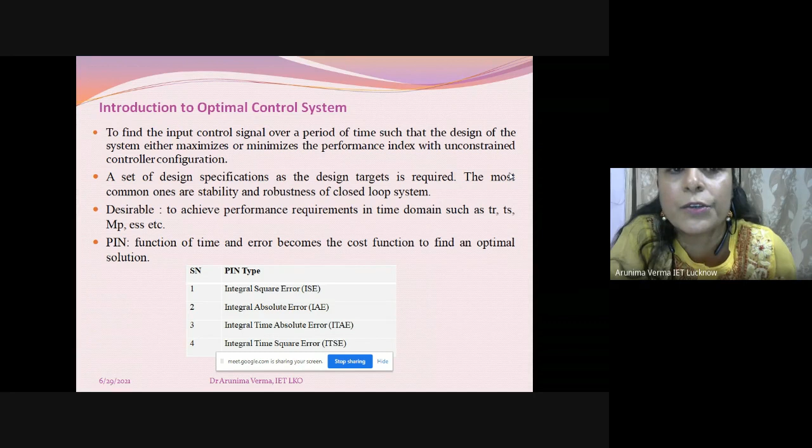Those who are listening, although it is an online technique, we will interact so that we don't get bored. A student responds: if we are considering any constraints on control, that means any minimum or maximum value, either on control or state. Unconstrained means you're not putting any limit.

Now you may ask, or rather you should ask, what is the difference between parameter optimization and optimal control system? Can anyone say what the difference is? There's one major difference.

A student answers: parameter optimization means we need to optimize the controller parameters. Suppose if it is PID - KP, KI, KD - we need to optimize and get the desired values. But optimal control means we need to obtain the optimal control in order to minimize the given performance index.

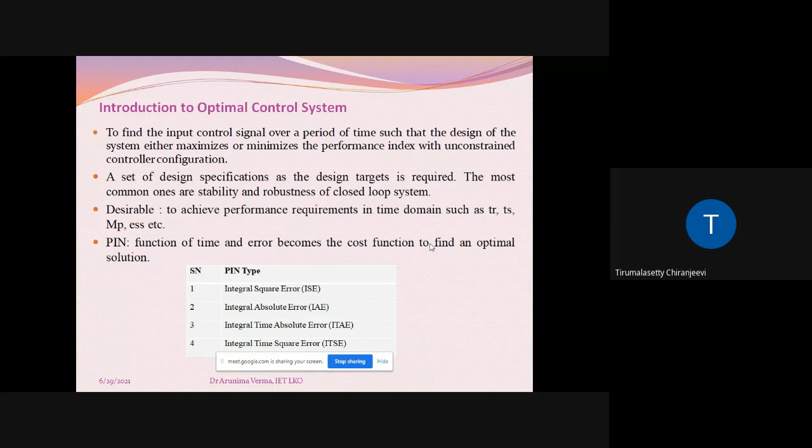To some extent, you stated the same thing put in the slide. But the major difference, although these two terms are often used synonymously, is that in parameter optimization we use certain kinds of constraints, we put limits, whereas in an optimal control problem we don't put any limit. That means it is an unconstrained controller.

What I mean is, when using a controller in an optimal control problem, that controller will not be limited - there is no boundation on what type or what degree of controller you are using. Whereas in parameter optimization, where you are particularly focused on optimizing one of the parameters, either maximizing or minimizing it, you should have a predefined controller - for example, a third order or second order controller with a particular type of configuration.

So when that type of controller is defined or predefined, we call it parameter optimization. And when the controller is not defined and is not required to be defined, we call it an optimal control system. This is the major difference between the two.

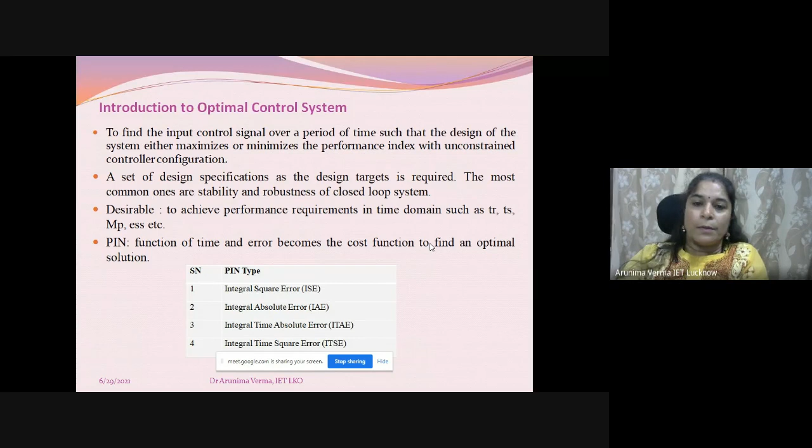The problem we are dealing with right now in speed control of variable frequency drives, we will use performance index minimization as a cost function, and then we'll go for how we are obtaining the optimal value using AI technique.

Normally in optimal control system, we deal with various types of techniques like Lyapunov stability criteria. Then we have observers like Kalman filter, and one common control, trajectory control, we go for predictive control.

Predictive control basically calculates and predicts, as the name suggests, the future value, that is it is optimistic in nature. It predicts the future value and control action, and performs a certain function through an algorithm designed such that the optimization problem at each time interval will be solved and calculated, and finally you get a predicted value.

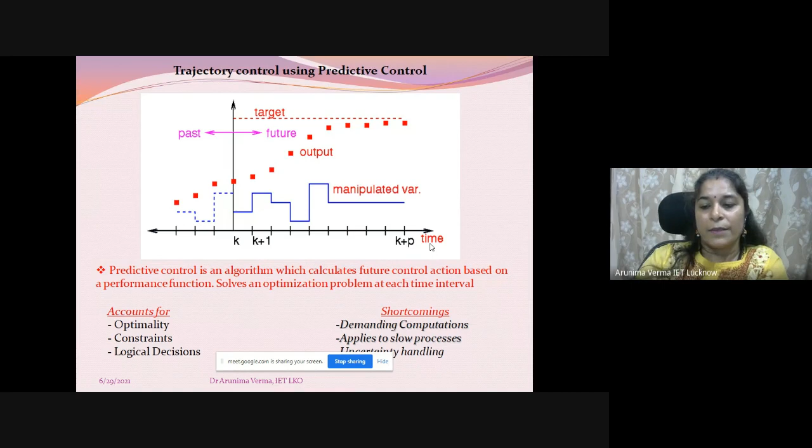So to make the system in totality a fast process control system, we go for AI techniques that we will be dealing with. This is the type of different types of predictive control.

We have deadbeat control, hysteresis based control, which is used in direct torque control, as we will be dealing with. This is what I told you, that I'll be introducing you to the 5-level flux controller, which is based on this hysteresis band control.

And then we have trajectory based, and finally model predictive control. So basically what I mean to say is, in predictive control, you require 3 stages. Number one, you should have a model to be predicted with. Secondly, there should be a limit or boundary defined for the optimization. And third, finally, you have the control output.

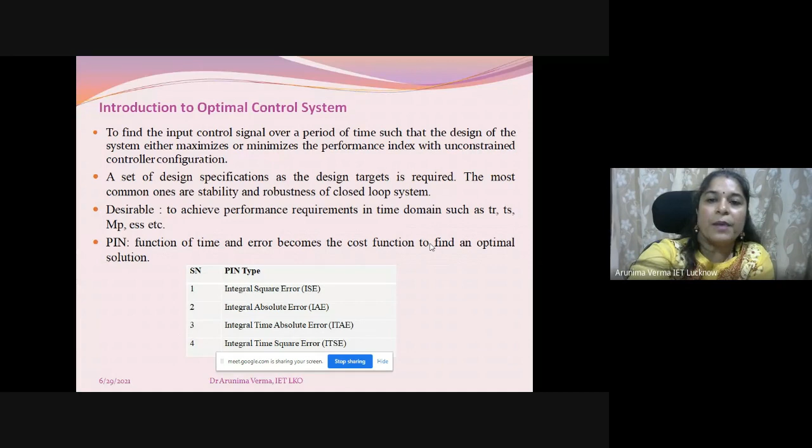Now, this is the part which I'm going to discuss in detail. As I already told you, we'll be dealing with the obtaining or improvement of transient response specifications, as you can see over here, where I defined that to achieve performance requirements in time domain, we take up these parameters or specifications, that is rise time, settling time and all. And these have been considered here as well under different dynamic conditions, that is starting, speed reversal, load application.

Now, an industrial motor, which works at very high power, has to deal with certain dynamic conditions. These are the 4 or 5 very common dynamic conditions which a motor has to face in an industrial application, because there are certain applications where it requires frequent starting, and speed reversal means braking of that particular speed of the motor. Finally, we have application of load and removal of load. That means you are suddenly applying the load, you are suddenly removing the load.

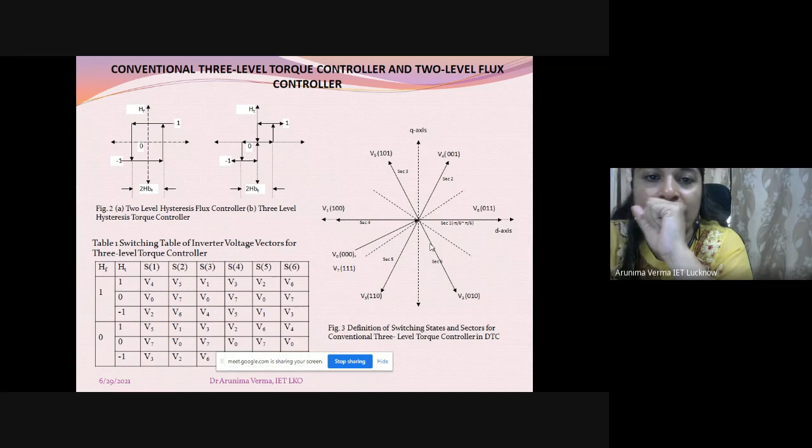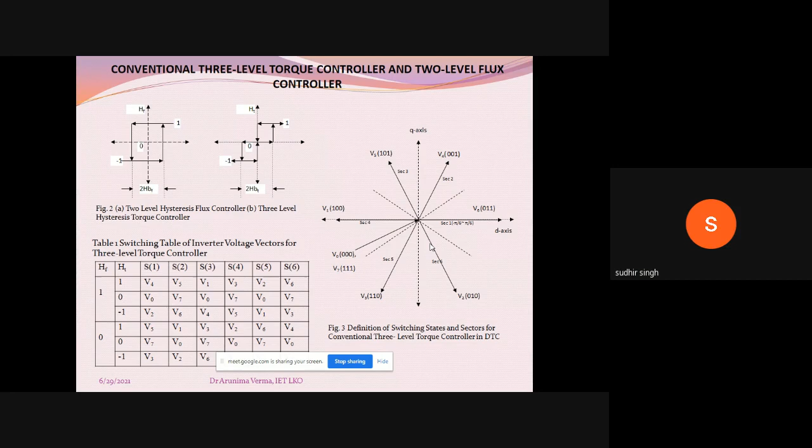Now, these are the space vectors. I don't know how much you know about space vector modulation. See, we have PWM technique. All of you know what a PWM technique is? Yes, ma'am. What is that? Pulse width modulation. What does it do? Actually, we compare the sinusoidal signal with the triangular carrier signals, and the pulses are generated. Okay. So one such modulation technique is the sinusoidal one. You can compare it with any reference signal; it is not necessary that it has to be sinusoidal. Although AC is easily available, that's why we can call it sine PWM as well.

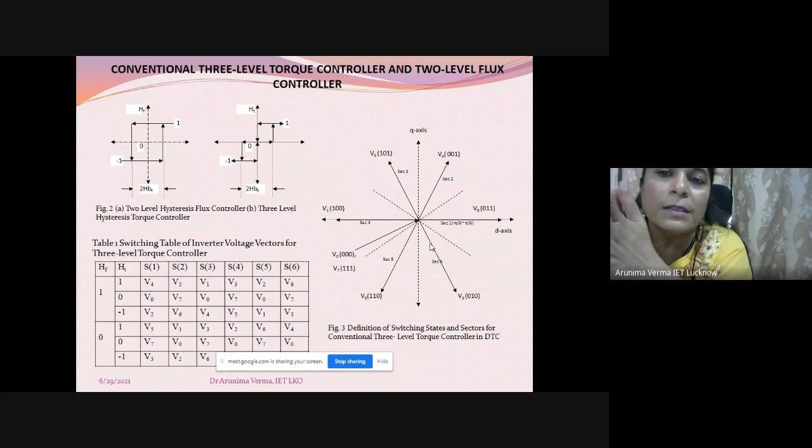Now, sine PWM or in general the PWM technique that we talk about is a very basic one. This space vector PWM technique is basically an advanced technique where the voltage that we are going to feed to the inverter as a gating pattern will be decided in a particular hexagonal trajectory. As you can see, the space vector is divided into 6 parts. That is why it is known as hexagonal, and the sectors are divided from sector 1 to 6, and the reference voltage will lie between these sectors only. This is how you define the switching pattern.

The switches of the inverter are going to be switched like this: 1 2 3 4 5 6 switches are there in a 3-phase inverter. So when the hysteresis band of the flux controller is 1 and 0, and the torque hysteresis controller is 1, 0, -1, how the switching will take place, and when these switches are on, which voltage vector will be available in which band is given by table 1. As you can see in table 1, by switching on the devices in the fashion shown, and with the hysteresis band of flux and torque controller lying in the range, you will get a particular voltage vector present in a sector given in figure 3. And then that particular value of voltage is available across the inverter. Is it clear?

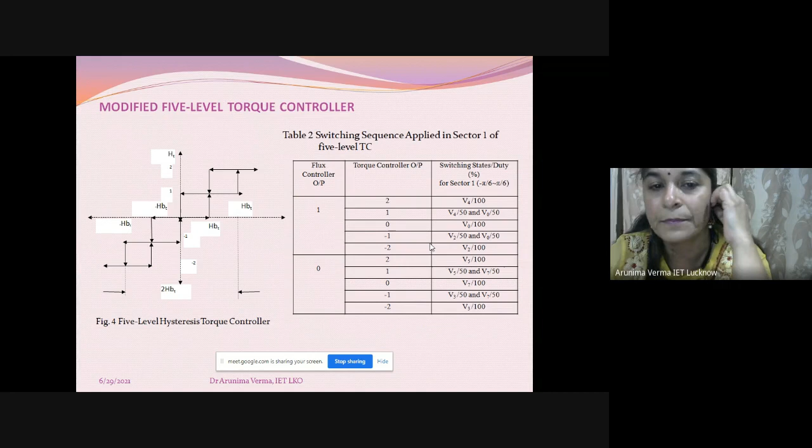Now a question arises: why are you only using a 5-level torque controller, and why not disturb the flux controller? See, you have only 2 types of control: torque control and flux control. Since it is a vector control technique, these 2 controls, torque and flux, are independent of each other. So either you can make a control modification in torque, or in flux. It is not that you cannot make changes in the flux controller. You can keep the torque controller as it is, change the flux controller and see what output you get, right? So in this case, the 5-level torque controller is being modified.

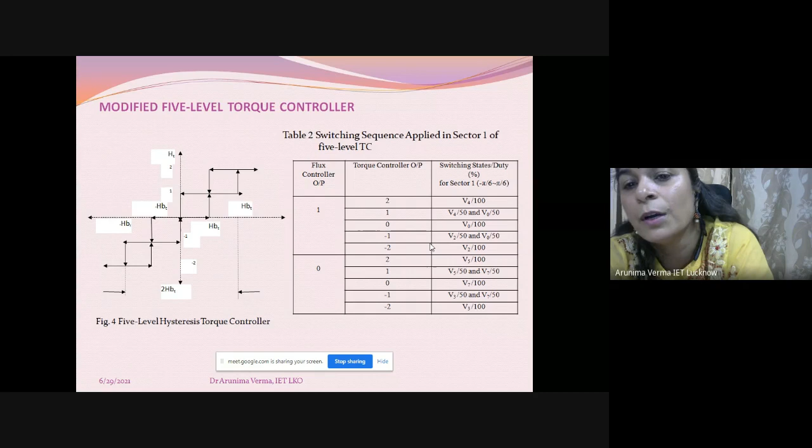That means 3-level is being modified into 5-level, and the levels are defined like this: 2, 1, 0, -1, -2. These are the 5 levels, and this is how the duty cycle of the devices, SCRs or thyristors connected in the inverter, are switched on. Table 2 basically gives you the same thing. As you saw in table 1, the torque hysteresis band is defined between 1 and -1, whereas in table 2 the torque controller output is defined between 2 and -2, going through 1, -1, and 0.

Now, as you can see in table 1, when switch 1 is on, we get V4, the 4th vector, which lies in the 2nd sector. We get this switching, 0, 0, 1, and V4 is available. Whereas when the hysteresis torque control goes through the 0 value, you get V0 as the output.

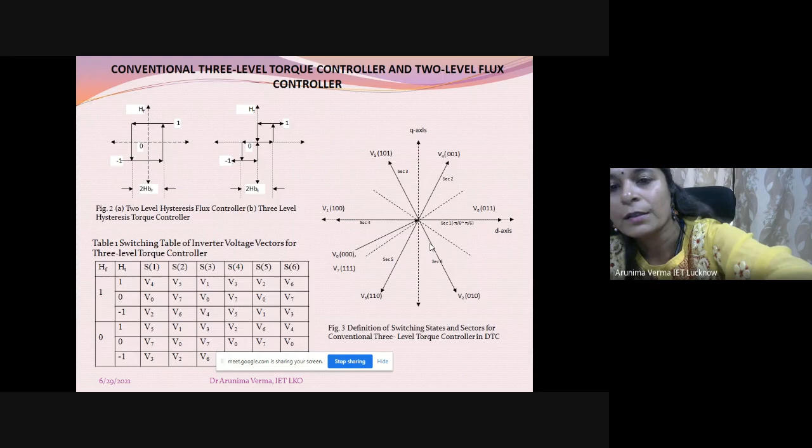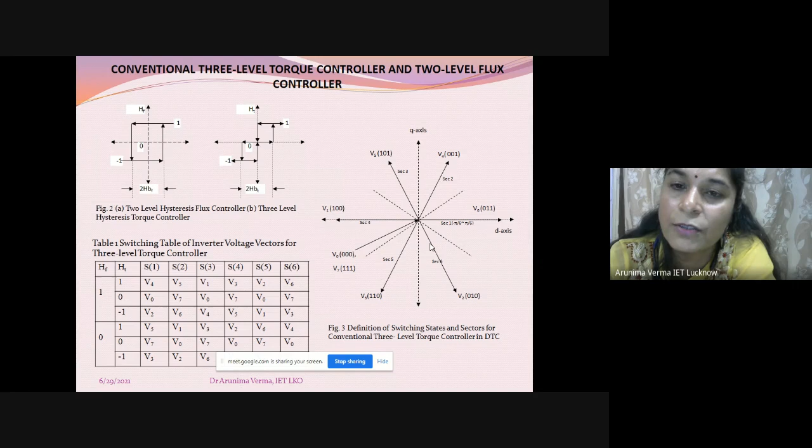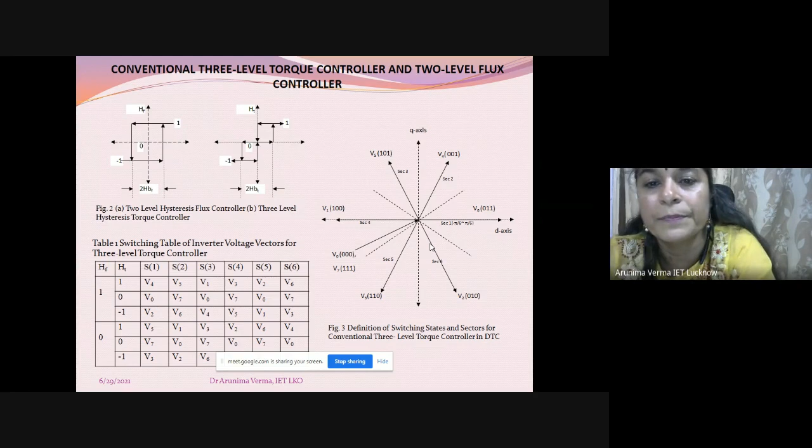Whereas in table 2, when the hysteresis controller passes through the 2nd level, V4 is applied 100%, whereas when it passes through 1, V4 and V0 are applied in the ratio of 50%. Half of the value is reduced. So this is how we have modified the switching states, and we obtain double sectors. The clear lines are the original space vectors, whereas the dotted ones are the further divisions. Of the 6, we have divided further, so a total of 12 sectors are there in the 5-level torque controller. And this is how the switching states are defined for the 5-level torque controller.

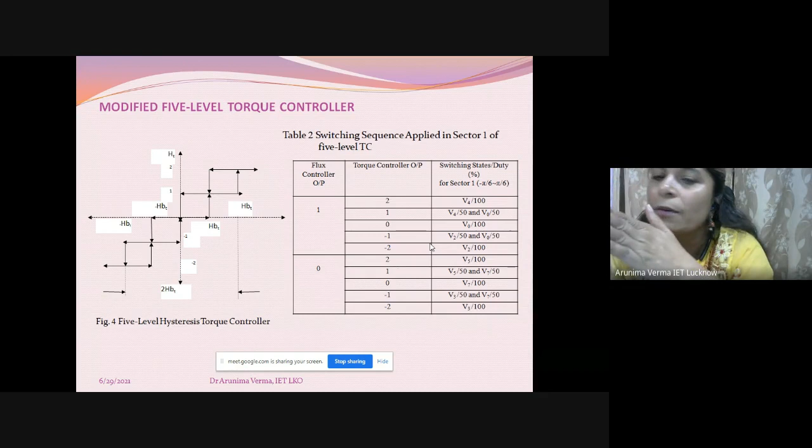Okay, after implementing this 5-level switching state, we go for the speed control technique. Conventionally, as someone said, we set a target of Kp, Ki, Kd. We optimize the values of Kp, Ki, Kd, and finally put them into the control system to obtain the desired output. The same thing happens here in the DTC control. We put the PI controller, or PID, whichever you want to use, and we optimize the gains: Kp, Ki, or if you're using PID, Kp, Ki, Kd. These three values will be optimized.

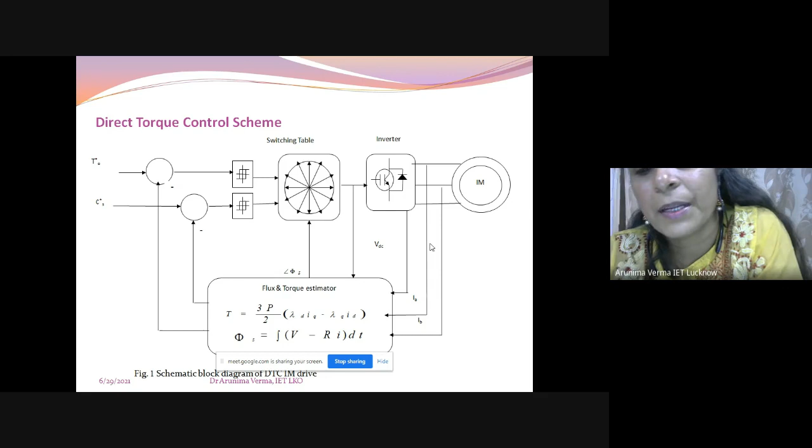Now, how are they going to be optimized? That means tuned according to the requirement. Conventionally, the tuning technique we use for the PI controller is Ziegler-Nichols, or ZN. In this case, we will be comparing the results we get with fuzzy and ANN.

Those results will be compared with those of the ZN tuning technique, and we will find that definitely the AI control technique has surpassed the performance of the ZN tuning technique, right? Now, tuning of parameters is basically, you can say, every time the PID controller gets an error, it minimizes the error, gives a control signal output, and finally you come near to the desired value.

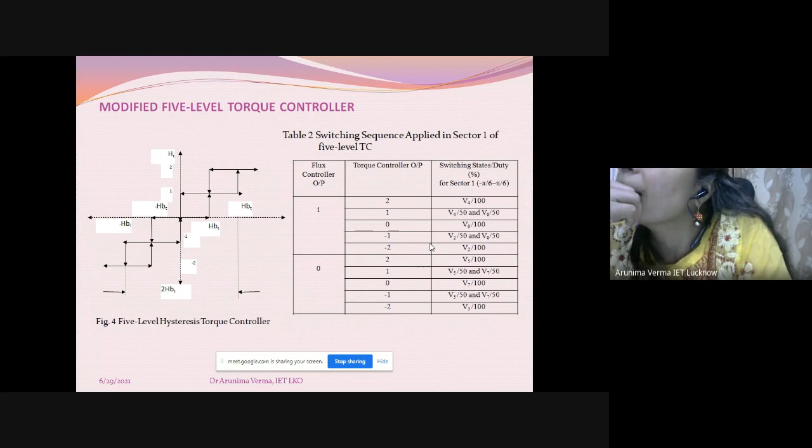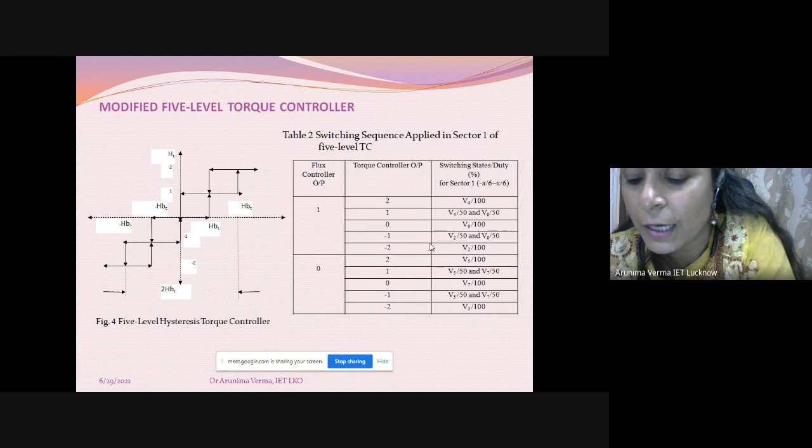This process of continuously refining the values is known as tuning, and the tuning can be done by the conventional technique. As I told you, one conventional technique is ZN, another one is Cohen-Coon, then we have the hit and trial method, and different types of tuning techniques are there. You can use any one of them to standardize or to mark a base for the comparison.

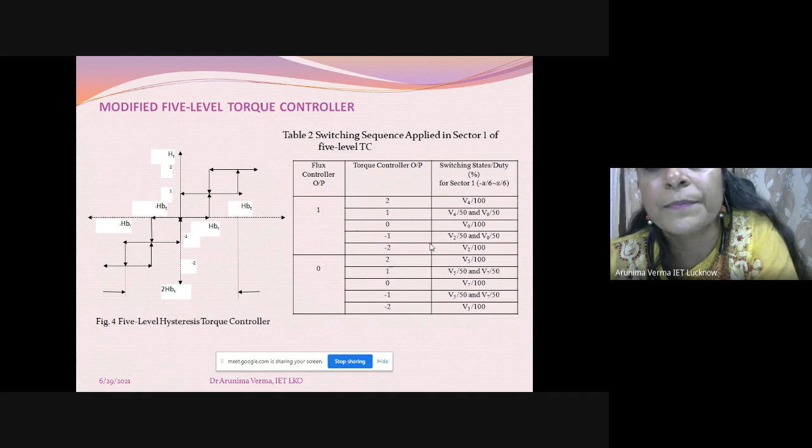So after applying the tuning of the ZN technique, we obtain the 3-level and 5-level parameters: response analysis, rise time, peak overshoot, etc. And we saw that the first target of reducing the ripple has been achieved. All this has been done using MATLAB, which is a very common software, and the same has been experimentally verified also.

As you can see, these two columns, that is torque ripple, the first parameter that we are basically improving is the torque ripple content of the 3-level and 5-level torque controller. So with the increase in the level of hysteresis controller, we see that torque ripple is minimized. So if you are going for 5-level or 7-level or further, you will find that the torque ripple content is further reduced.

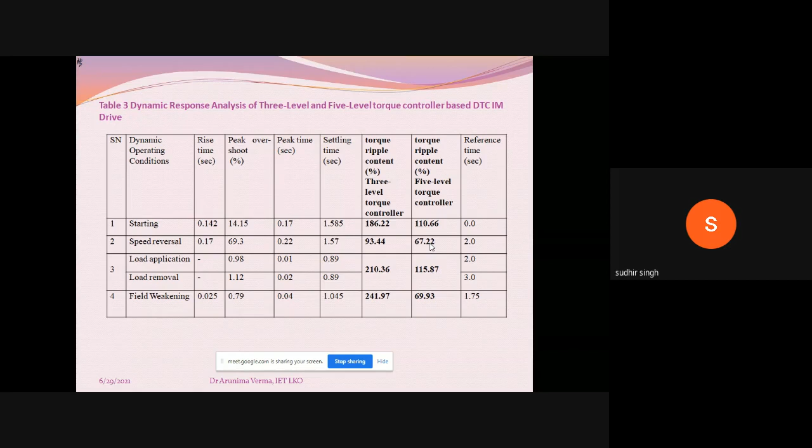But what is the drawback of increasing the level of torque controller? Anyone? Yes? What will be the drawback if we go for a higher level of torque controller? It increases the complexity of switching, the switching losses, I think, because we have to increase the number of sectors. Right. So basically, you have to have a compromise between the switching losses and the level of controller.

You have to select, depending upon the application, which parameter you want to take care of. Either you want to go for ripple minimization, or forego the switching losses, or strike a balance between the two. So I went for a 7-level torque controller also, and I saw that although it is reducing the torque ripple content, switching losses are increasing because you switch at higher frequency and the number of sectors is increasing. So the restriction of the operating point within the hysteresis torque controller band is basically getting smoothened up.

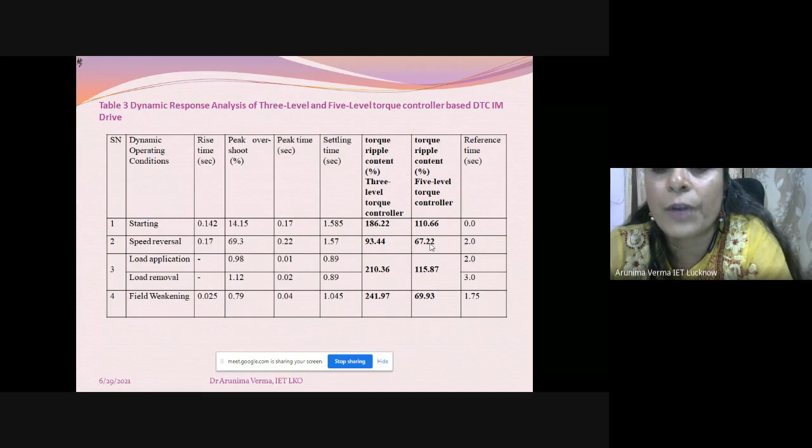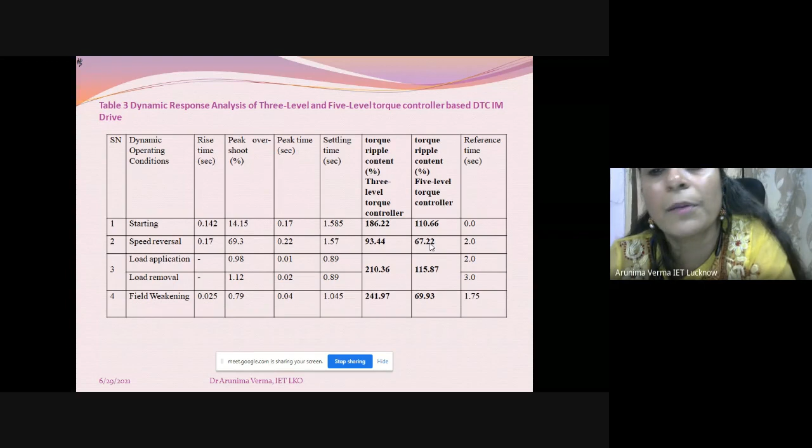But since the devices are being switched quite often, they are getting heated up, and you are confronting the switching losses. So depending upon the application, the user has to strike a balance between the parameter optimization and the target to achieve. So a 5-level torque controller was, in a sense, an okay one. It is reducing the ripple content to some extent, and it is not making the system that complex.

Now, coming to the AI technique, we have the fuzzy logic speed controller, which is a very basic, one of the oldest AI techniques that were invented. The name itself is a very vague one, because whatever we compare or track, the data is very abstract. It is not well defined. That is why the name given is fuzzy.

The range which is there is not very precise. It lies between 1 and -1, or say 2 and -2, like that. There will be infinite stages of comparison between 1 and -1. Say we set the limit between 1 and -1; still there is an infinite range where this controller has to compare the values all the time and find out the optimal value. So fuzzy logic is basically dependent upon how abstract you are getting, how the values are defined in an abstract manner.

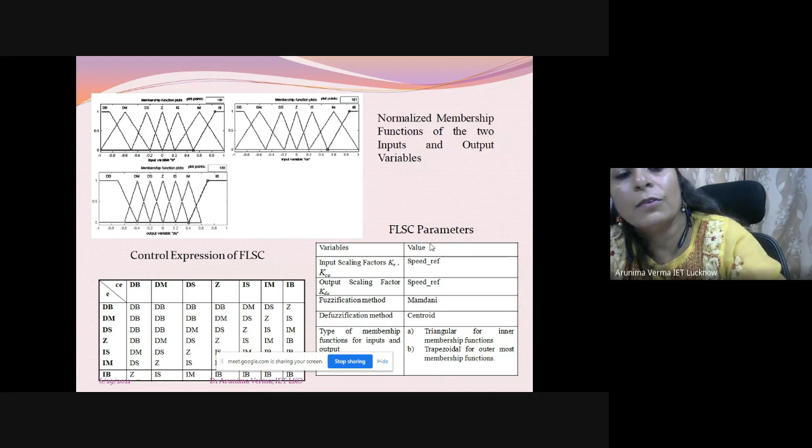Although fuzzy logic gives you a good amount of accuracy, it makes the system very sluggish, because every time it has to go through the parameters in a very vague manner. Since the values are not well defined, it has to every time carry on the process through these abstract values that you are defining through the rule base.

So fuzzification, there are different fuzzification methods, Mamdani and Sugeno. So here in this case, we are using Mamdani, whereas Sugeno you can use where you want singleton output. Singleton output means you want only one output of all the calculation. Then you use the Sugeno method. Otherwise, we normally go for the Mamdani fuzzification method, where it compares and gives you a number of optimal values.

And then the defuzzification method here uses the centroid one. In this case particularly, we are using membership functions as triangular, and trapezoidal for the outermost. These are the rule bases which have been defined. Finally, when you incorporate these membership functions and fuzzy logic controller in the whole model of the DTC induction motor drive, this is how you incorporate it.

Instead of PI controller, here earlier a PI controller was placed, and now that same PI controller has been removed and the fuzzy logic controller has been put up. So this is another controller. This is definitely an optimal control because it is tracking the target, and the target is basically tuning of PID gains. So that target is to be achieved by minimizing the transient, or by improving the transient response specifications.

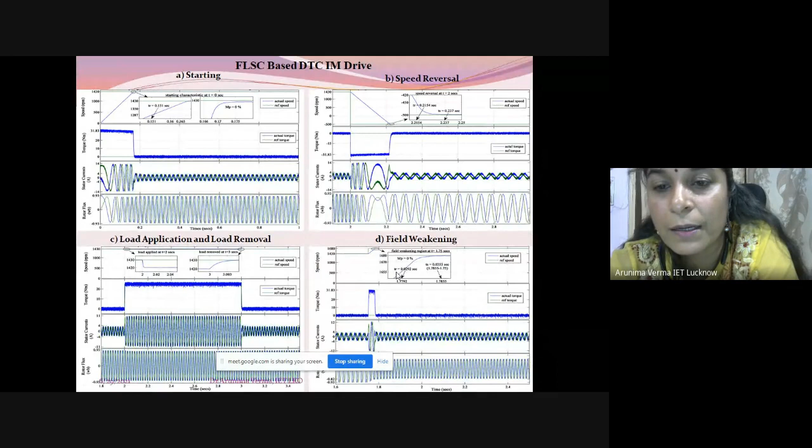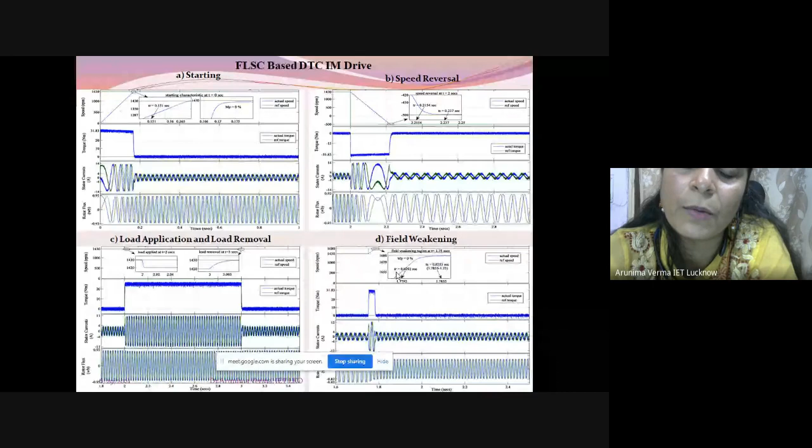So when you go beyond the base speed, the flux weakens up, meaning sufficient flux is not developed. When there is not sufficient flux, proper EMF will not be developed, and the motor will not run. So this field weakening process has to be taken care of very frequently, because we have to ensure that the motor does not stop after the weakening of the flux. This is another dynamic condition that a motor has to face when the speed goes beyond the base speed or the synchronous speed.

Now, till now we were dealing with fuzzy logic control, which was very vague and abstract, and we defined the control expressions—a tedious task, because every time, for each membership function, you have to give an abstract value and define it. As the number of membership functions increases, the number of rules also increases. There are 49 rule bases defined in 7x7 membership functions of the input. Every time, this fuzzy logic has to go through these 49 values, compare them, and then finally find out the value.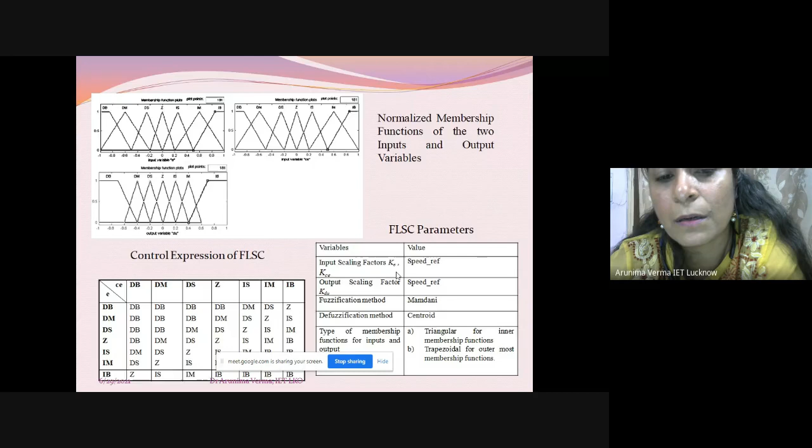A much better and fast technique that we use with the help of available data is artificial neural network. Artificial neural network is basically derived from a biological system, because in our body we have neural cells and neurons which transmit signals from one part to another. Say from hand, you want to move your hand, so it has to go to the brain, and then brain gives the instruction to the hand that it has to be moved. So that whole process takes place with the help of neurons and nerves carrying signals from different cells to the brain cells.

If you're watching something, if you're hearing something and you want to understand those things, that has to be grasped. That means you're watching through your eyes, the eyes are giving signals to the brain, the neurons are carrying the signals, and whatever action the brain decides will be carried out by the eyes.

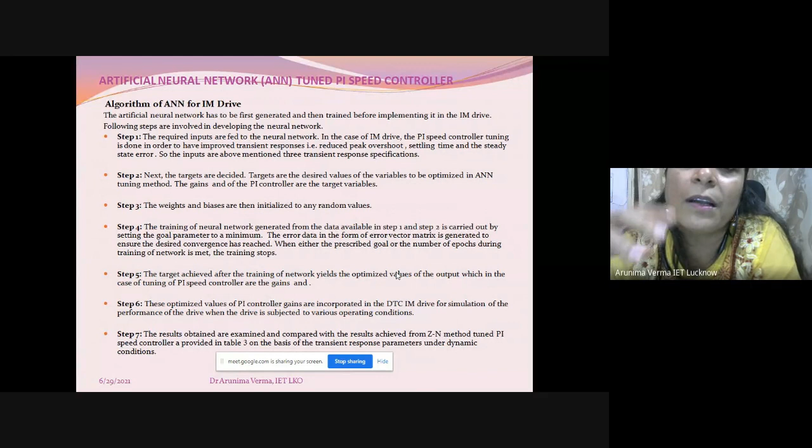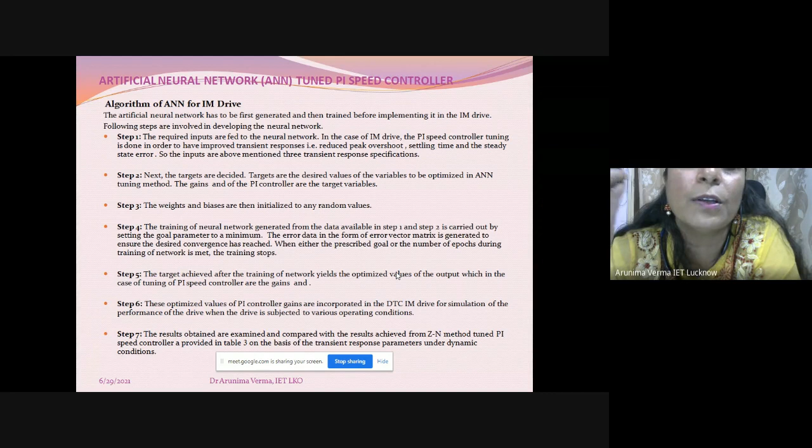Similarly, while walking or driving, every activity that you perform with your body is basically carried out through the neurons present in the system. So artificial neural network is one such network which is defined and designed on the basis of neurons present in the body and how these neurons carry the signals or data.

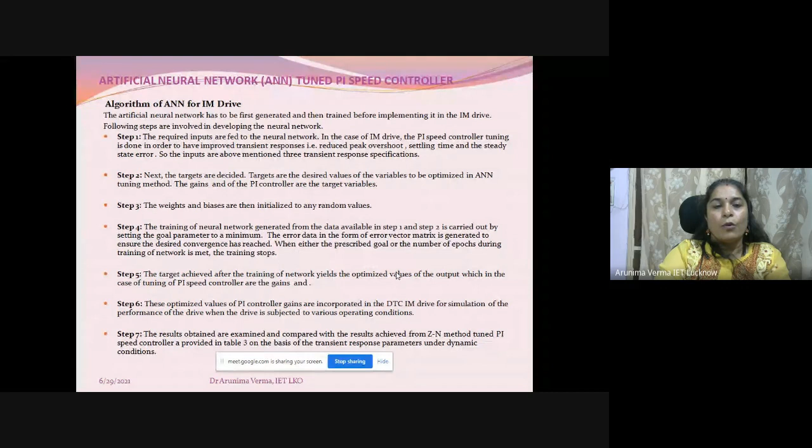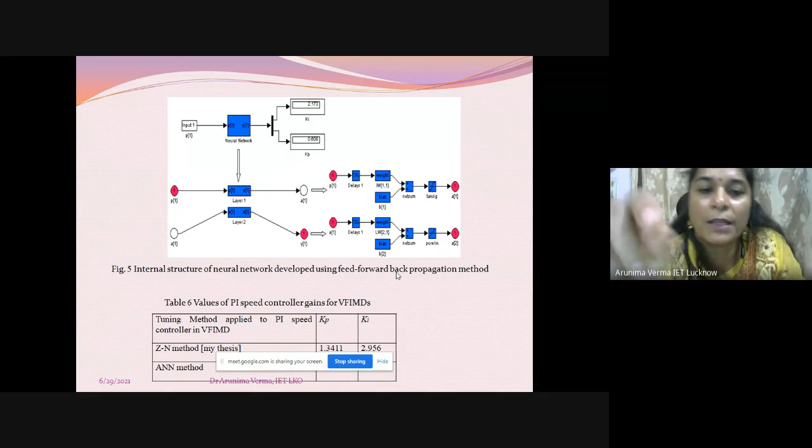These are the few steps we go through in designing the algorithm of ANN, and this is the ANN model that we developed. Here we have the neural network, which has got two layers. We are giving the input, and we are giving KP and KI as the output. Step one: the required inputs are fed to the neural network.

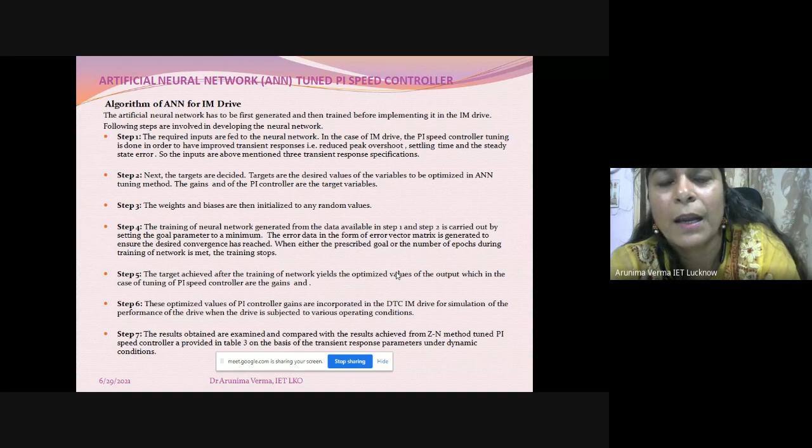In case of the drive, we are using a PI speed controller. If PID is used, then the target will be KP, KI, KD. Tuning is done in order to have improved transient responses, the same steady state speed responses we are taking up, reduced peak overshoot, settling time, steady state error, etc. Our target, after improving the ripples in torque and speed, is improvement in the performance of the motor or drive by minimizing the peak overshoot and achieving improved transient response specifications.

Now these transient response specifications are the time domain specifications that you have all studied in second order control systems.

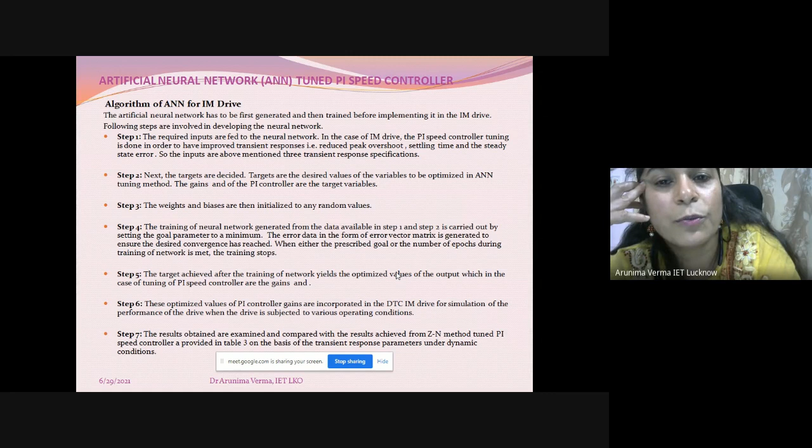Then the second step is to decide the target. The targets are the desired values of the variables to be optimized. In this case, since the PI speed controller is being tuned, the gains of the PI speed controller are made the target variables. If it is a PID controller, it will become KP, KI, KD. Instead of a PI controller, if you are tuning a sliding mode controller or some other controller, the gains of that particular controller will become the target. You can also use a model predictive controller here and set the target accordingly.

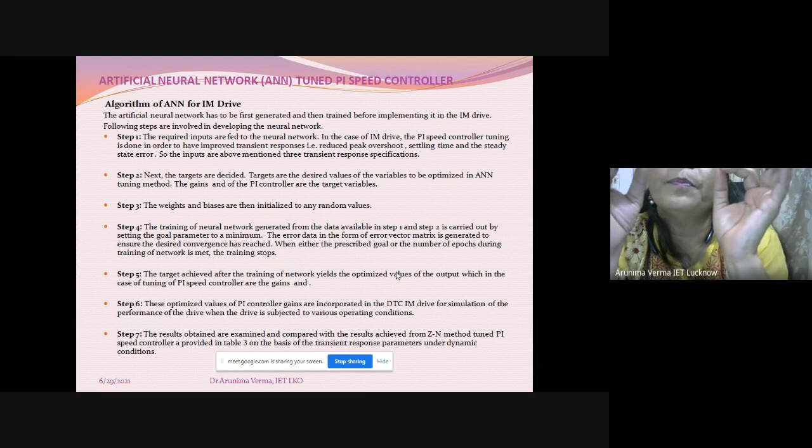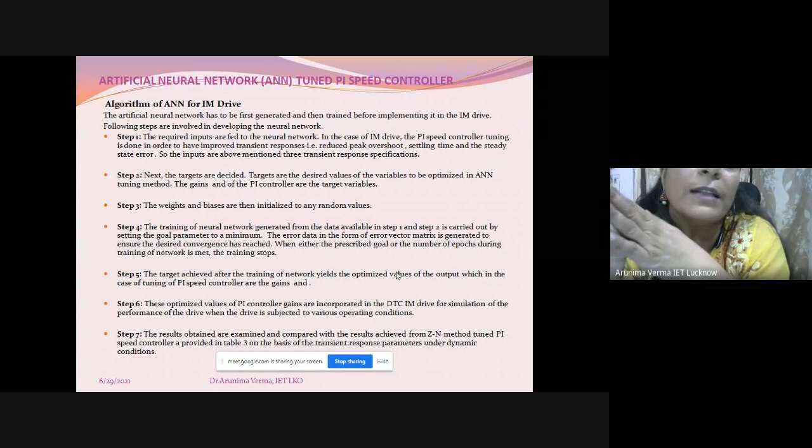Now the advantage of ANN is that it trains the network. Basically the training of the neural network is done using the data available from the ZN technique. You employ the ZN technique for tuning of the PI speed controller. Now ZN technique is giving you almost, not exactly, but to some extent an optimal value. Now you want to further refine this optimal value and have an accurate value, and that can be achieved when you are training the data obtained from the existing tuning method so as to improve over that particular method. Are you getting my point?

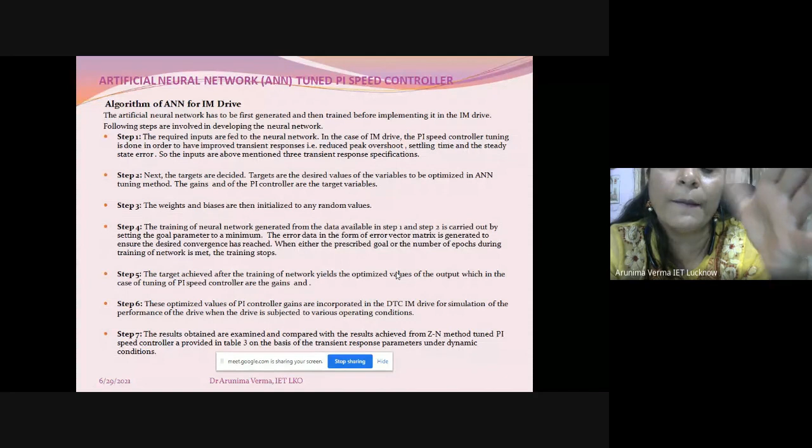Basically, you used a technique, the ZN technique, and from that you got a value. Now that value is already giving you a good result, not a very good one, but yeah, definitely it is giving a much better result as compared to hit and trial method, etc. You are getting a much better result using the ZN technique.

Now you want to further improve the result that you are getting from the ZN technique, you want to further enhance it, and that enhancement is done using the ANN. It can be done in a much better way using ANN rather than fuzzy logic.

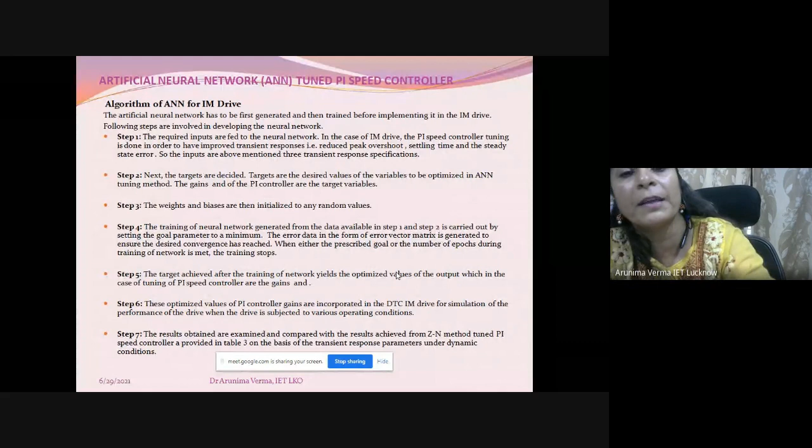You use ANN, and whatever ZN data you have, the complete KP, KI, KD data that you got from ZN, you use that as it is in the ANN and train the data. So whatever new values you get, whatever new optimized value you get, it will be better than the ZN technique that you were using.

So the training of the neural network generated from the data available in step 1 and 2 is carried out by setting the goal parameters to a minimum. Here the goal parameter is basically the performance index that we were defining.

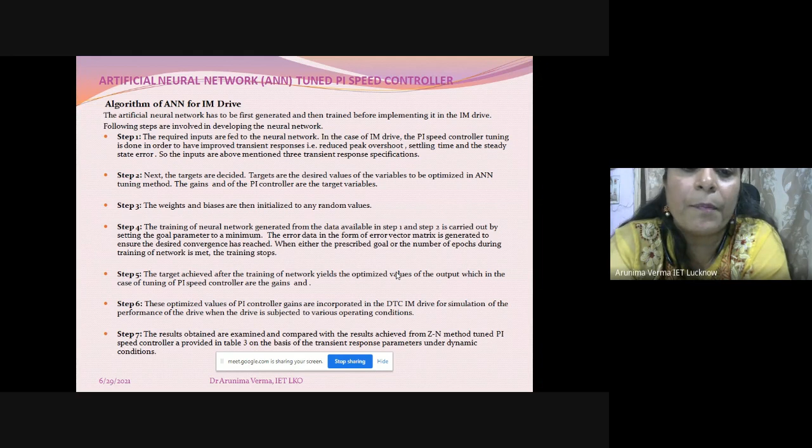Here the performance index, say ISE integral square error or integral absolute error, one of the performance indices will be set as a goal parameter and it will be minimized. The error data in the form of error vector matrix is generated to ensure the desired convergence.

Convergence means how fast you achieve the desired target is known as convergence. So however well your neural network works, the faster it works, the sooner your convergence will be achieved. When either the prescribed goal or the number of epochs during the training of the network is met,

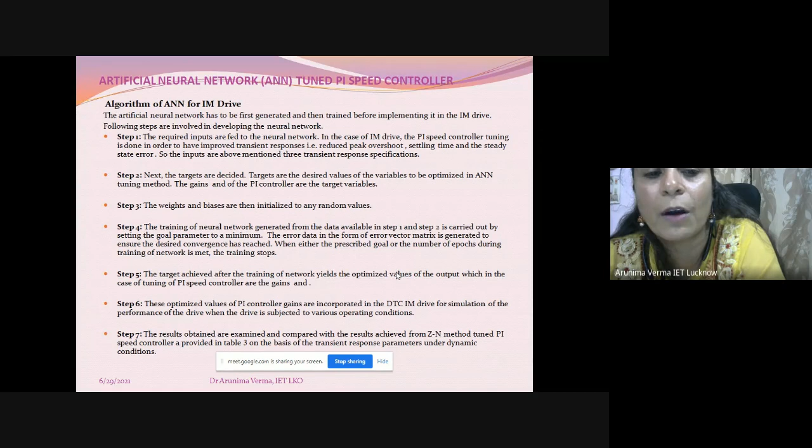the training stops. Now the target achieved after the training of the network yields the optimized values of the output. In case of tuning PI, the target, as I already told you, you have a target, and very simply you take the AI technique.

You just understand that you have a target and the target is to be achieved by refining the data available, and that refining of the data is done using AI technique.

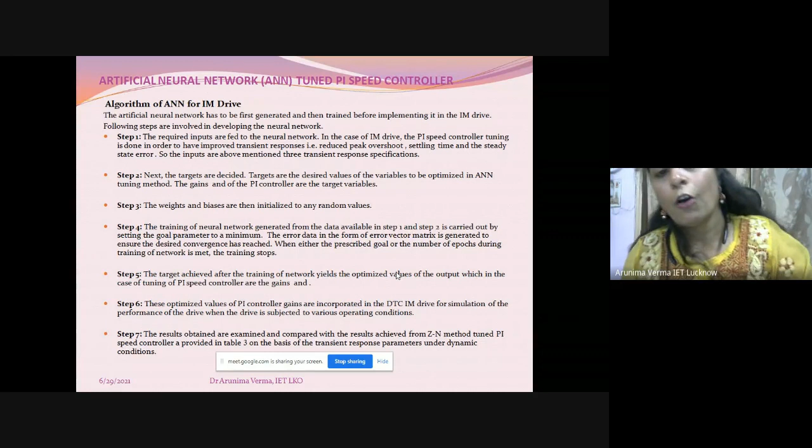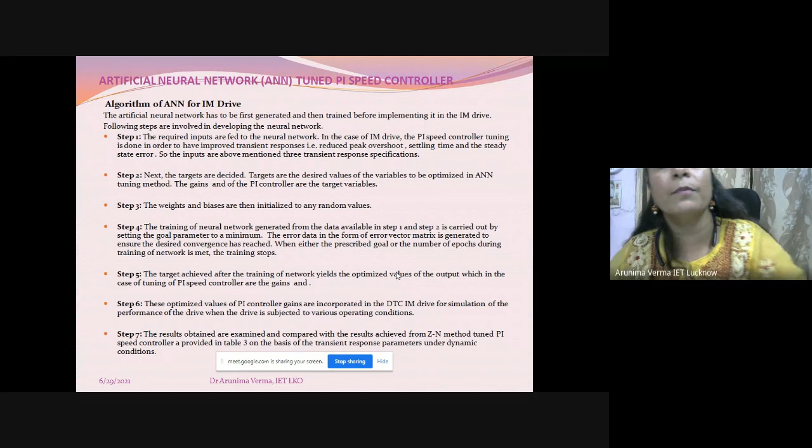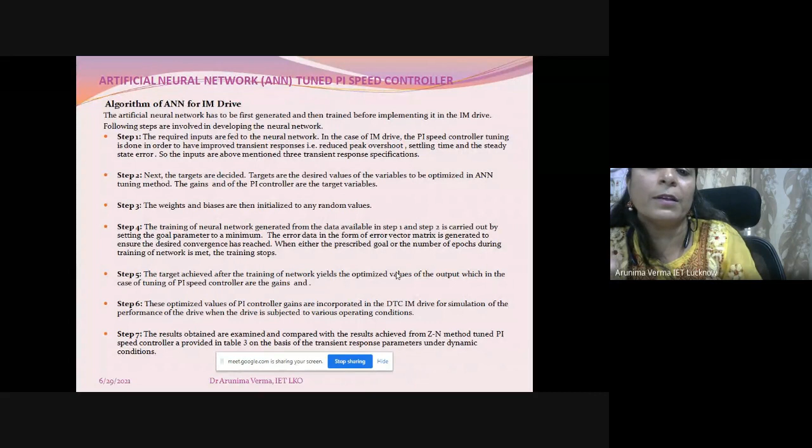And whatever AI techniques there are, be it bee colony optimization, be it ANN, be it genetic algorithm, be it particle swarm, whichever technique you take, there is one common thing: whatever your target is, to achieve that target you take some parameters which are your cost function, and you minimize them by training, or every time you are comparing the data with that particular set and getting one output out of that.

These optimized values of PI controller. Now this is the algorithm which is being defined for ANN.

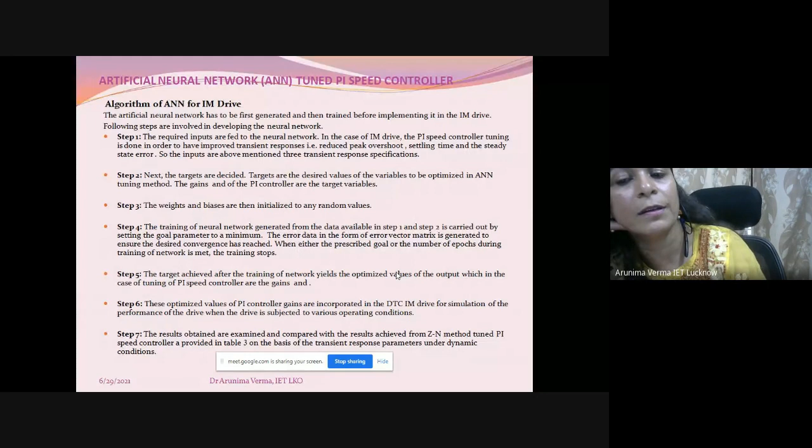So when you achieve this target, that means you got the optimal or tuned value of KP, KI. Those optimized values of KP, KI will be incorporated in the DTC induction motor drive for obtaining the result. Finally, the result will be compared with the ZN tuning method as shown in table 3.

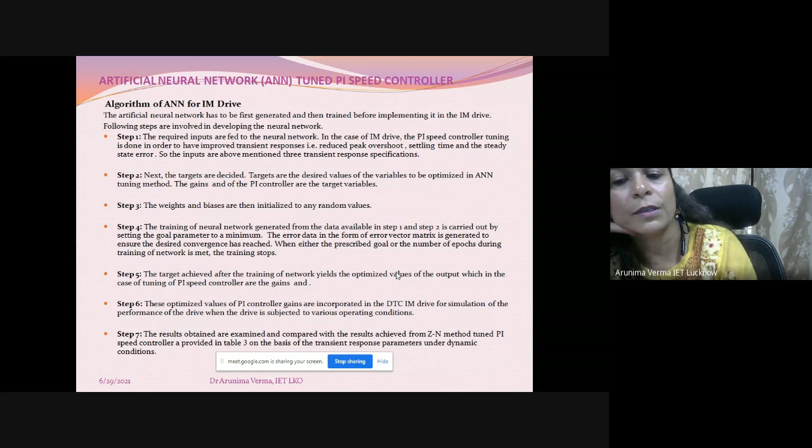Although you can get a more precise and more accurate form of result when you are programming the things, since tools are available, toolboxes are available, you can directly use them: feed the data, feed the input, feed the target, and feed the training data or the data set, and you will get the neural network developed.

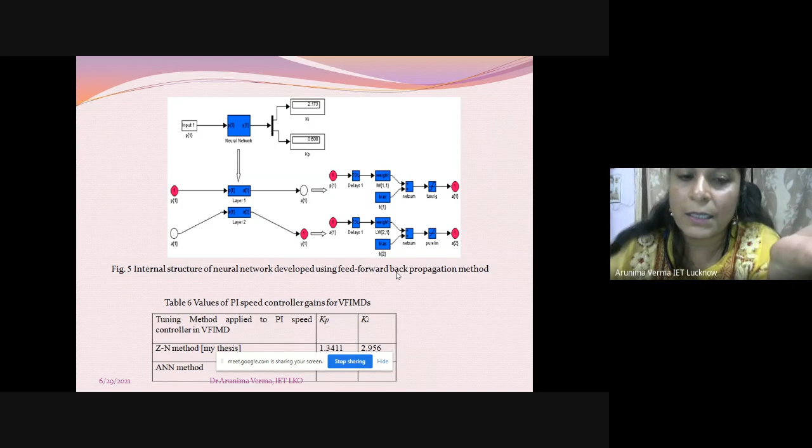These are the KP, KI values which we have opted. Finally, the results and discussions.

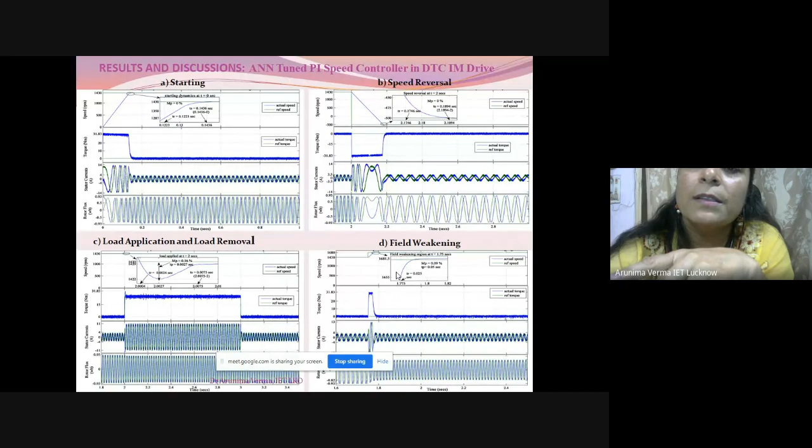The results which we obtained in fuzzy logic, similar kinds of results are obtained using ANN, but with an improved value. You can see there is an inset in the graph where the values are defined, and you can see that the settling time is achieved much earlier as compared to fuzzy logic one.

You can see from table 7 as well, which shows the settling time of the ANN which has been achieved. It is improving the peak overshoot, that is, it is reducing the value of the peak overshoot. Remember, the system here is not overdamped. In case of fuzzy logic, it became an overdamped system, but in case of ANN, the system is not overdamped. It is critically damped, or you can say it is underdamped, and the system is settling down to a certain value in a much faster way as compared to the fuzzy logic one.

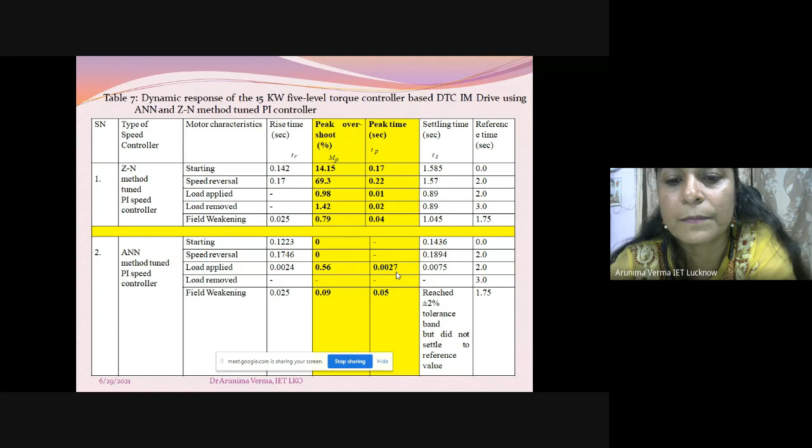Whereas in case of an artificial intelligence technique or machine learning technique, you just have to have a set of data which is already obtained from the conventional technique, and from there you can easily take the data and extrapolate. Extrapolate in the sense, you have a set of data, you have a cost function, and you have well-defined variables which are compared, and finally you get an output of what can be the near output in future.

So this is all about advanced control techniques which we are using nowadays in every research area, in electrical applications, chemical applications, or mechanical also. Although the name is mechanical engineering, it is still using AI techniques in achieving certain targets in mechanical components as well. So the AI technique is a very advanced form of optimal control technique. That means it is using the trajectory path, and a tracking control system is used in AI. It tracks the various points, various data sets, and finally gives you a value.